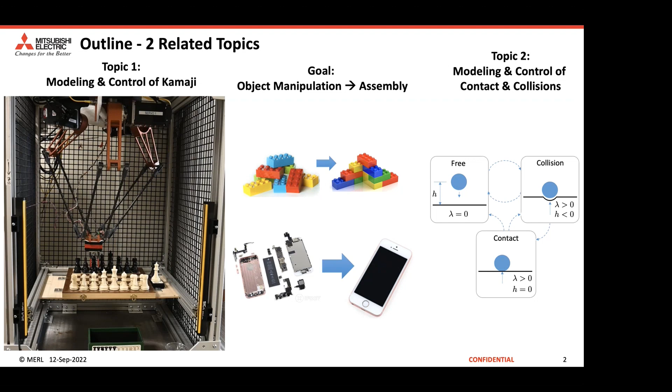So it's kind of ironic, but the robot, we got it to play chess over the summer. It's pretty fast, actually. But it's moving pretty slow because otherwise it'll throw the pieces around. Anyway, you can see how it works. And of course, this is a Modelica conference, so a lot of the work has been done using the Modelica language and sort of a combination of mathematics and the Modelica language.

Delta robots are becoming more popular now that there was a patent on these that expired about 5 or 6 years ago, maybe 10. On the right, they are closed chain kinematics, so that makes all the math a little harder, but not impossible. The advantages are primarily that they're very low mass, low inertia, and so they move very fast.

When we're doing assembly of things, we want to have a very low mass manipulator so we don't wreck what we're trying to put together. Obviously, conventional robots do some assembly. They have a lot of mass, they have very high friction joints, they move very slow. Honestly, the dynamics of contact and collision is neglected.

We're more interested in using a very low mass, low impedance device that can be very safe, but also very precise at the same time.

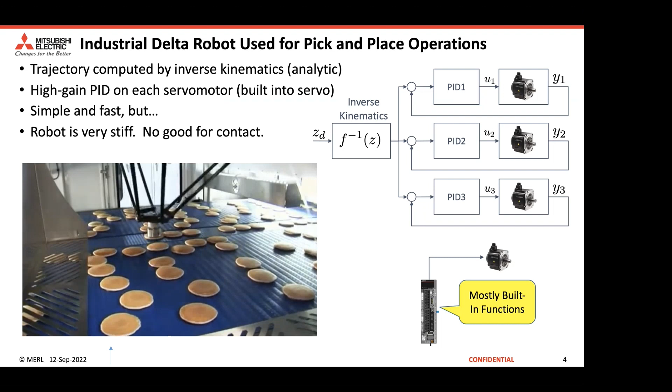So most robots are used for sort of pick and place, I should say all, and they're just controlled with a bunch of PIDs, very simple. This is how pancakes are made, if you ever wondered. The robot just picks and places them up off different conveyor belts.

But really, the goal here is to design some kind of nonlinear control. The first step is to feedback linearize the robot and do impedance control of the robot. So that's done. And then the second step, probably the more interesting one, is how do I cause the robot to assemble something?

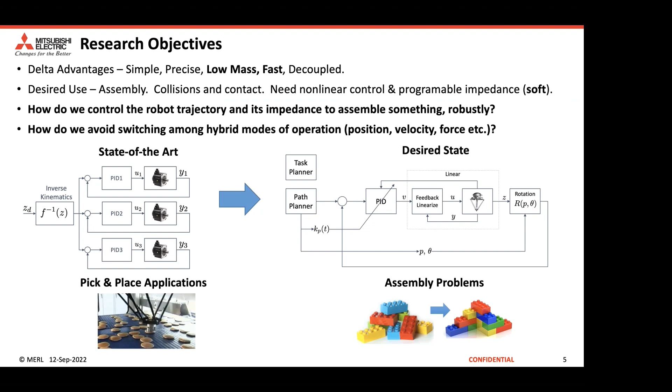We're trying to actually model the physics of contact and collision to do that. The Delta robot is challenging because the forward kinematics, which is the map from the joint angles to where the end effector is, is not explicit. You can't write it down in closed form. You have to write it down as an implicit set of equations, and because of that, everything gets a little bit more complicated.

One of the fun things about this, I'll go through this kind of quick. Probably 5 years ago, I figured out a way to model this as a set of differential algebraic equations, and you can embed that. There are a number of ways to represent these, it's not unique. I like to represent the dynamics of this in a higher dimensional space, and then you get a set of, essentially at the bottom, sort of 24 equations and 24 unknowns as an index 1 DAE, which Dymola loves to, or any OpenModelica too, likes to simulate and handle without a problem.

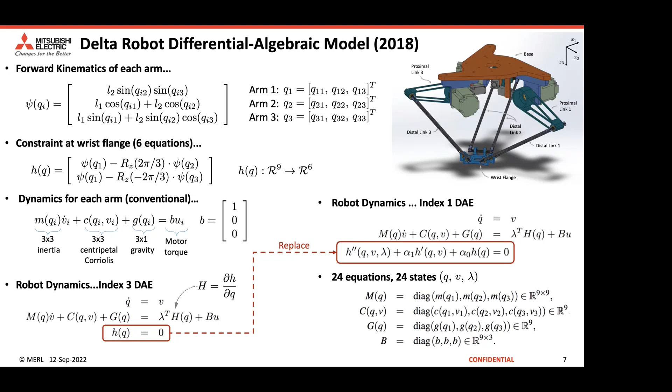One of the interesting things about this robot is it actually has two different Jacobians, if you know anything about robotics. The Jacobian is the map from a force applied to the end effector to the joint angles and the joint torques. One of these Jacobians we use for simulation, and you can actually write that down in closed form. Here it is, and that just maps a force to all the joints.

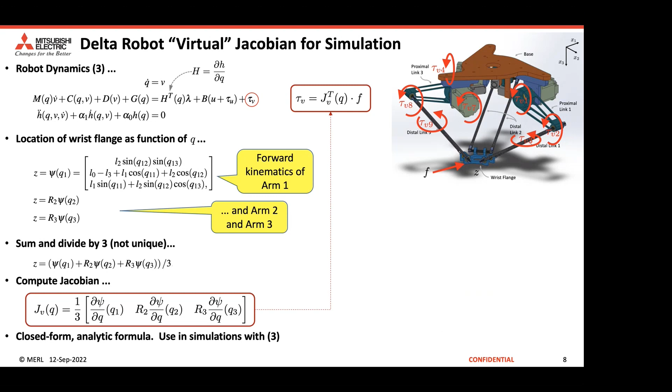But the control Jacobian, which is what we need to do control, which is the map from the force to the motor torques, this cannot be written down in closed form. So you also have to compute it as a solution to a set of nonlinear equations, and so you can only compute this numerically, algorithmically.

I think people will understand this. This Jacobian should not be used in a simulation because it's an algorithm, and you don't want to put an algorithm which has got a termination condition inside of a smooth model because it'll cause the solvers to get a little annoyed. So we use the other Jacobian when we're simulating the effects of force, and we use this to control.

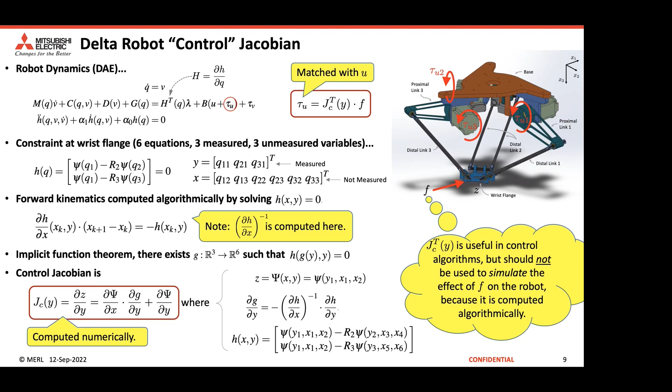So really what makes this robot interesting is its low mass and low inertia and very high speed, but also the fact that you have to use a lot more calculus to do things like computing its Jacobians.

One of the fun things about this robot is it has all sorts of weird kinematic singularities. One happens, of course, when the arms are all straight out. But another happens when the six parallel links at the bottom here all become parallel themselves. If you move it into this configuration, it's really singular, and it just becomes a spherical pendulum. It's useless as a robot.

What's interesting is that the model we have is global, so it can simulate through these singularities without any problem. Of course you can't control it through a singularity like this, but we can model it through the singularity without any problem, and that's what you want in a model.

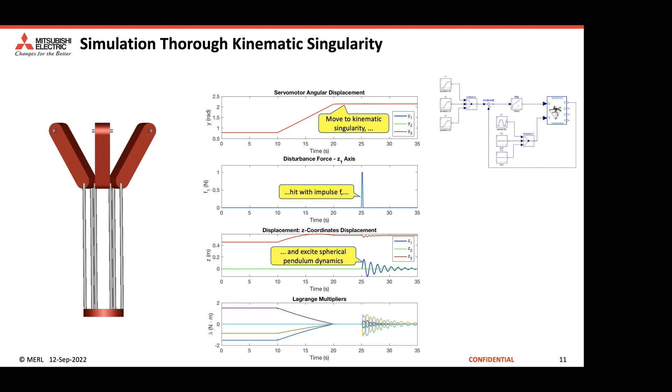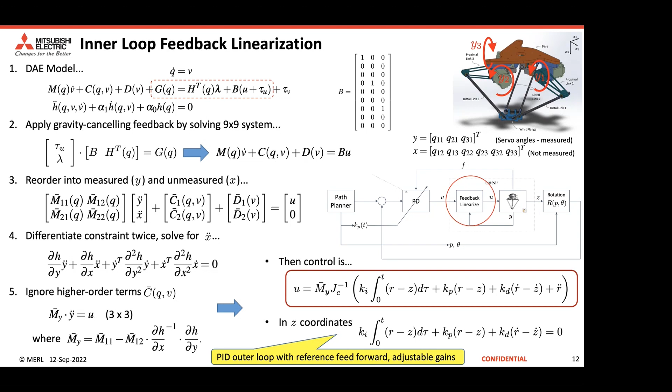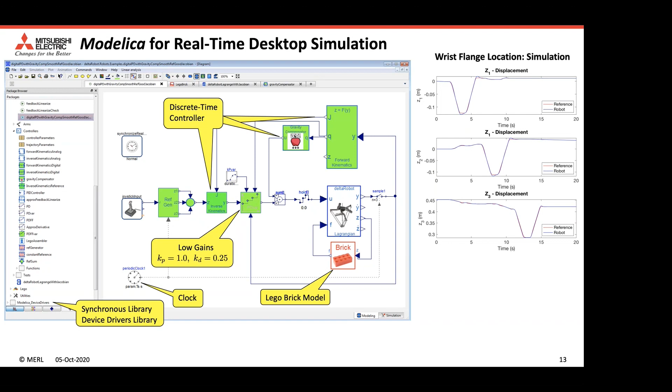The fun thing we did, and I think this is probably the main message here, is I had an intern just before the COVID time come and write an interface from Dymola, using the device drivers library, to the actual robot that we built. We wrote some C code to glue it together. Then we can just unplug the model of the robot, plug in his little interface, recompile it, and run a real-time experiment of this nonlinear controller moving the robot around.

I think this is nice - we could get it to run on, this is like 2018, a vintage 2017 decent PC. It's all running in Windows at about 500 hertz sample rate, which is pretty good.

And especially for an academic lab, or in this case Modelica—I said this yesterday too—you can use Modelica as a language to represent the physics, to structure the physics, to design and realize controllers, in this case all in discrete time, and then do a laboratory experiment all on the same platform.

Never have to recode anything, which I love, because I really don't like coding. Or recoding, I should say. So this was fun. He finished it the day before we closed down for COVID, and then the robot sat there for a year and a half and wasn't used. But you can see we hooked up a joystick, again through the device driver's interface, and could make it move around. It has really nice tracking, and that was kind of fun.

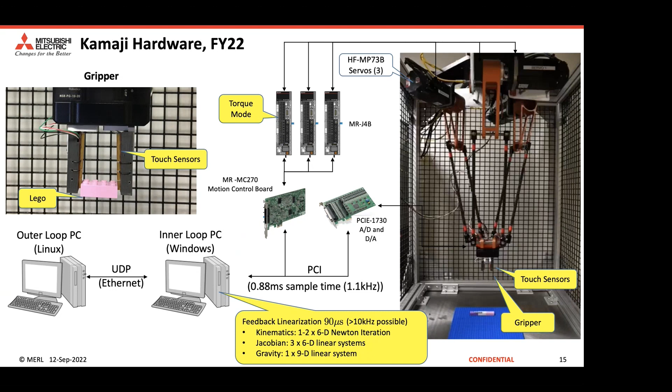So we're now starting to use some touch sensors and play with assembly type problems. I'll show you—well, I'm not going to show you it moving, I already showed you that.

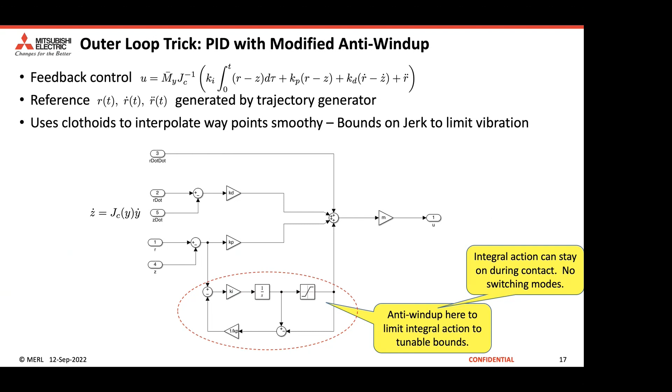One of the tricks we came up with is to modify anti-wind up a bit. When you're doing robotic assembly, if you have integral action in the outer loop and you come in contact with something, that integrator is going to wind up and you can get bad behavior like this. So normally the integrator is turned off in these robotic applications. Actually, if you implement the anti-wind up in this way, you can leave the integral action on, and when it comes in contact, you don't get that behavior. So that was kind of fun.

Another cool result—I did all these simulations in Modelica—is to simulate the effect of using touch feedback on the robot impedance. So this is kind of fun. You can actually reduce a robot's impedance with touch sensing feedback, and you can only reduce it within the bandwidth of the sensor, but it's actually quite significant. So if you go up there and touch the robot, it feels like it has much less springy feel to it. You can't do anything about the mass, but we already reduced the mass with the actual robot design.

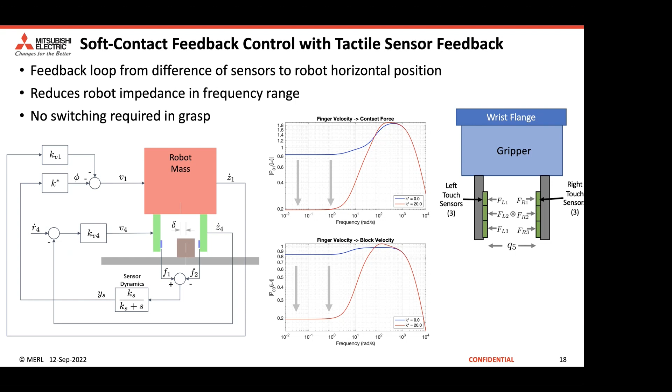So I'll skip this. There's an animation from Dymola, and here's our touch sensors, and it's got a very soft feeling. I think there's a movie here, it should run—and maybe not. How much time do I have? I don't know. Oh great, okay, I better speed up.

So it's very low impedance, and the whole point here is that when this thing contacts something—suppose it's holding something and you're trying to plug something in—you want to have a very soft, low impedance robot, not stiff. So if there's a little bit of uncertainty, nobody gets hurt. I have it playing chess. You probably all saw that video of the poor Russian kid who had his finger broken by the robot chess player in Moscow six months ago. This one won't do that.

Anyway, so it's probably enough of that. We're trying to look at this assembly problem, and I have a different point of view on robotics, maybe—it's much more of a model-based design approach. I'm actually trying to model contacts and collisions among different types of objects.

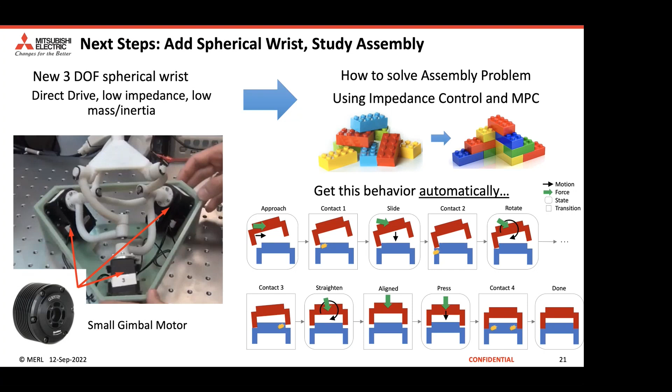And I realize this is actually kind of like what Dirk was talking about this morning. A lot of the modeling paradigms are actually missing the dynamics of collision. So I've been spending time looking at how to model that in a way that essentially ends up being a hybrid or multi-mode differential algebraic equation type model, which is perfect for Dymola.

I did write a paper on this three or four years ago that was wrong. It missed a few of these states, but we fixed it now. Actually, this is a very effective way to model contact and collision.

It's very well suited to Modelica because Modelica has this nice hybrid model of computation, with excellent state event detection. Essentially when two things come in contact, the state machine will change state, and I'm busy trying to figure out how to properly formulate that.

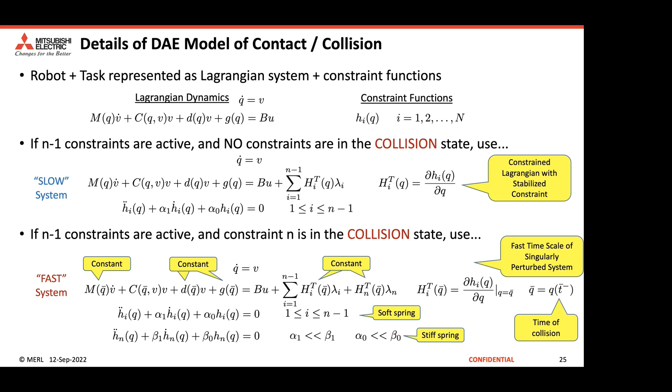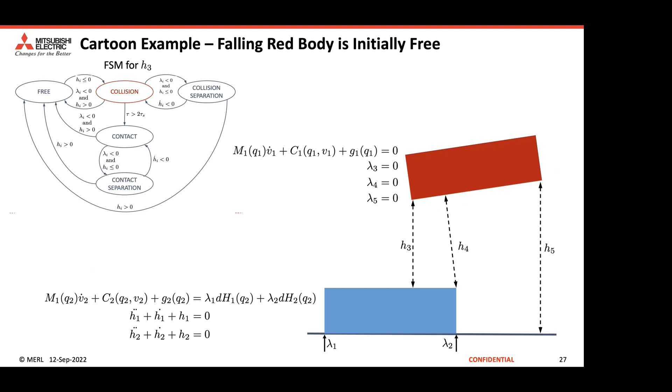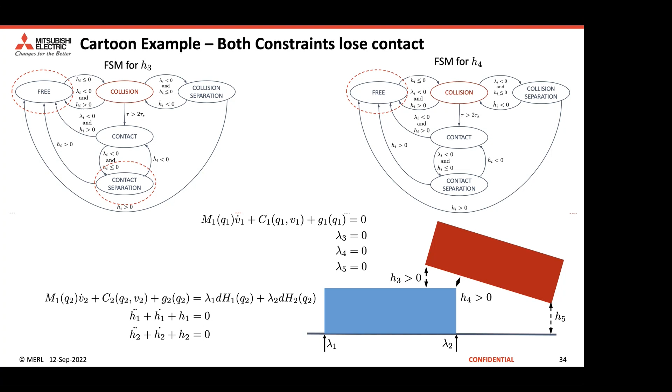Here's a toy example where this brick falls and touches, and there are a lot of events, which is fine because there are a lot of events. It goes through all that. The compilers, both OpenModelica and Dymola, handle this all beautifully. I sometimes think I'm going to miss an event and it's going to be a problem, but they're very robust.

One nice thing about this model is it's actually continuous, so you can show that solutions exist. Most models of contact and collision claim to be discontinuous - there's a jump in the velocity. That's because of the modeling paradigm they've chosen, not because the actual physics is discontinuous.

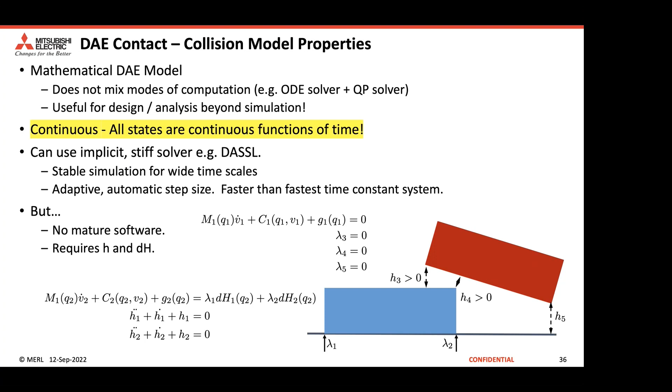This is a different modeling paradigm, and it's continuous. It's very much what Dirk was talking about this morning: you get stuck in your context and think that's the only physics, so you think it's discontinuous, but actually it doesn't necessarily need to be. It's nice when things are continuous because it's easier to solve.

So we've done a bunch of toy problems. I won't go through all this.

The next step, and this is my last slide, is to put these ideas together. I can simulate things moving around now, and I want to use this model to synthesize control that will assemble objects. The piece that's missing that I didn't talk about is the concept of a distance field. Distance fields have been used a lot in robotics for collision avoidance - I'm actually going to use them to cause the collisions we want to have, to assemble something.

I'm busy realizing that in Modelica in a library, so we can not only simulate an example of a robot, but actually structure the math and synthesize new types of controls.

So that's my user presentation. Yeah, it was a lot of fun giving these. I appreciate having the opportunity to talk about this and not have to write a paper. I like writing papers, but I'm many papers behind, as some of you know, and it's embarrassing. So I'll stop.

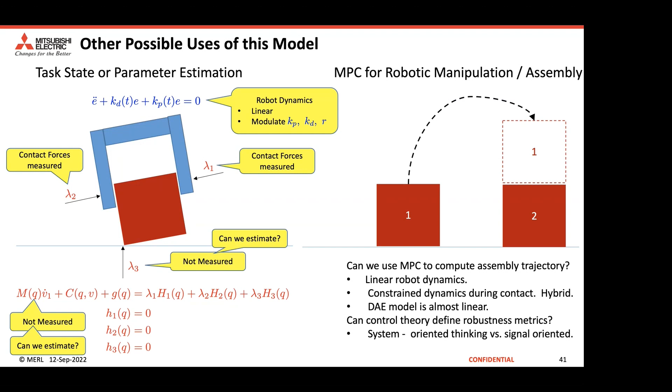So I wonder, how well does it do in that context? No, it's a really good question. I don't think this is appropriate for big, large scale - we can talk more about it, but I think there are going to be problems. It's more suited to a small number of collisions, which is the kind of robotics problems I'm interested in.

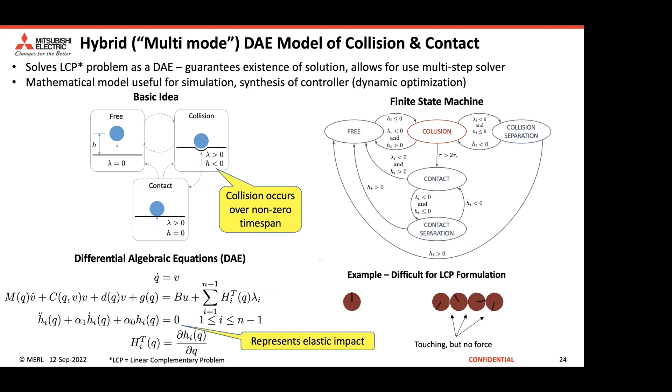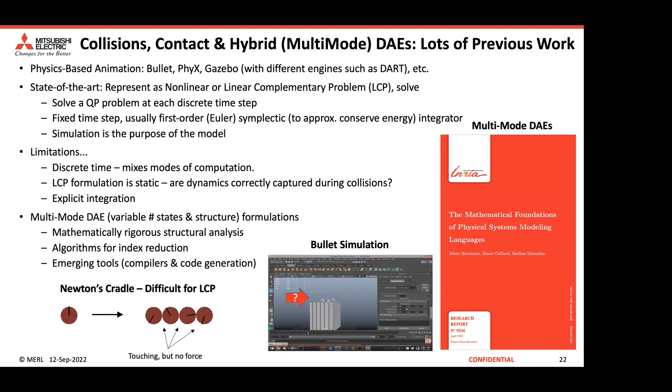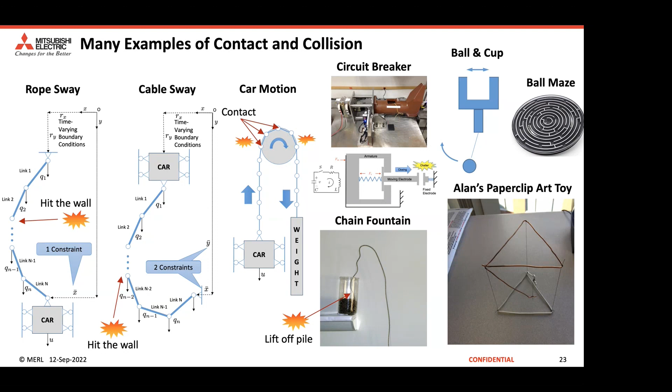My talk is on prototyping a composable simplification process for equation-oriented models using Modeling Toolkit. My core point today is that Modeling Toolkit makes it easy to design new and better simplification algorithms because of its interactivity. So a bit on Modeling Toolkit - just like Modelica, it's an equation-oriented modeling language. You have the common connection paradigm, and here is how to define parameters and variables and specify equations.

The composability of Modeling Toolkit mainly arises from the fact that all the transformation processes take an X system and return a Y system. X and Y are deliberately different because there is more than one type of system in Modeling Toolkit.

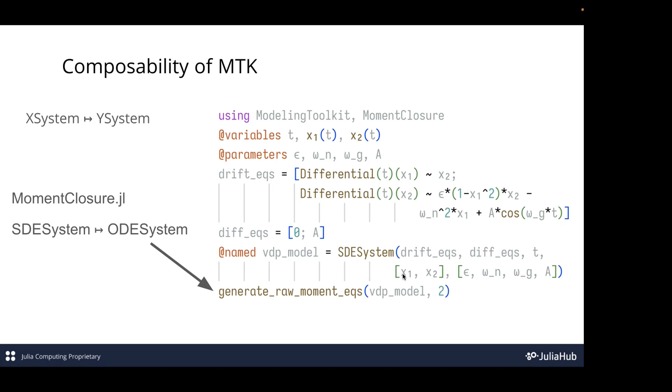So here you can actually also convert the reaction network to an SDE system, and then from the SDE system to an ODE system by using the moment closure package.

So Scott yesterday was mentioning how he wants a nonlinear symbolic model order reduction pass. So we actually already have that.

It's using the POD-DEIM technique that takes the symbolic representation of the model and the snapshot of the model to run a nonlinear order reduction on this ODE system. So it takes the ODE system and then returns another ODE system.

And even better, we have a frontend that converts Modelica to an ODE system, so all the previous transformation passes are actually usable for Modelica models.

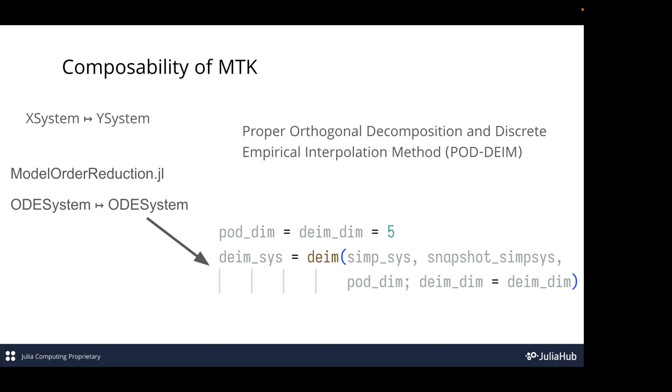And all these passes are actually not written by me, the Modeling Toolkit author. Especially for the nonlinear order reduction, this is written by a master's student just over the summer, and he is actually also in Cambridge, so we can talk about that in more detail as well.

So how have all these young contributors easily added all these transformation passes? They really didn't ask much of my help. So what makes MTK so hackable?

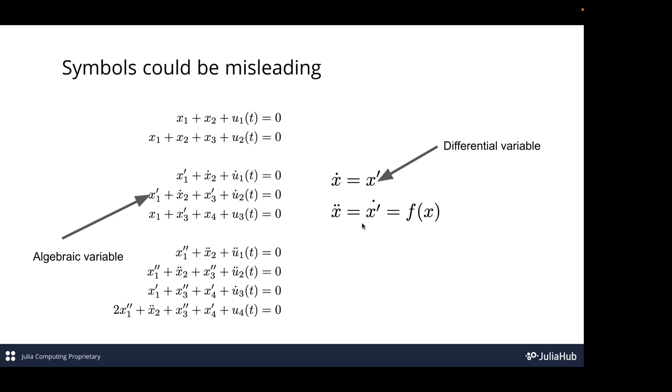Because the derivative of variable x1 prime never actually appears, this makes it an algebraic variable. But there is a derivative of x prime in here, so this is a differential variable. So that's actually not dummy, despite that it doesn't look like it.

If we think a bit deeper about what tearing really is, it's just a process that tells us which variable is being solved by which equation. So if variable number 1 is being solved by equation number 4, then you should have that mapping.

But some variables are not reducible, so it could be nothing. This nothing would indicate that this variable is not solvable. All the differential variables cannot be algebraically solved. So we can encode that information by adding another singleton type called selected state.

Then the classification of the dummy derivative just becomes that those are variables that appear to be differentiated, but the lower differentiated variable is not a selected state, which means it's an algebraic variable. That makes it a dummy derivative.

And in practice, this looks like that. So this is the original system in the paper. So after dummy derivative...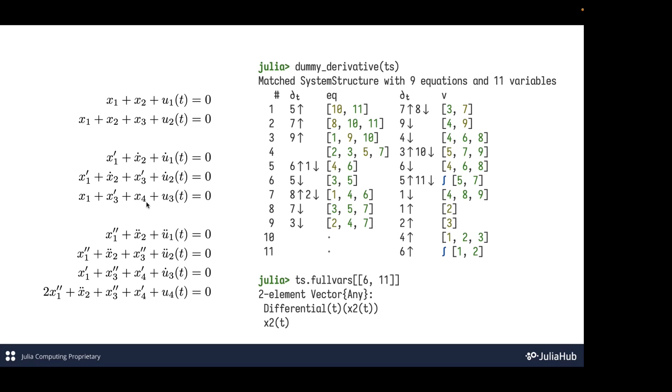And then I will talk about alias elimination. Alias elimination actually happens before the dummy derivative, but for the sake of presentation, I thought it makes more sense to talk about dummy derivative first.

Because equation-oriented modeling generates a lot of connection equations, and those are in the form of A equals to B, or summation of all variables equals to 0. Alias elimination removes those trivial linear equations.

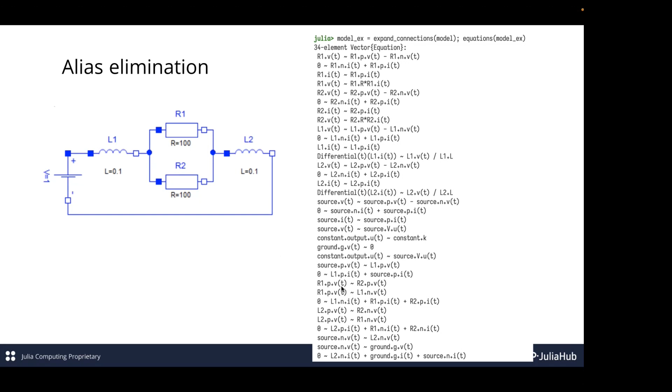So originally, this model had 34 equations. And without running alias elimination, just running dummy derivative, we can see that we have 4 equations.

But this system looks a bit weird, right? Can anyone tell why this is a bit weird?

So these two variables are differential variables, and then they are the only variables that appear in the 3rd equation. So that means this system cannot possibly be an index 1 DAE.

Because sometimes when running Pantelides, Pantelides is only a bit weaker than checking the actual numerical rank of the system. So sometimes it could give you a non-index-1 DAE.

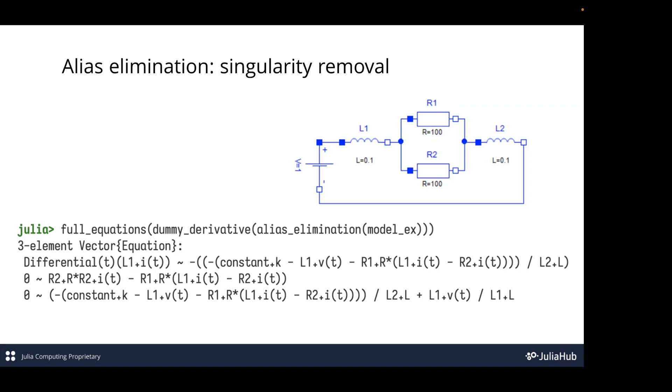Alias elimination will solve this problem because it removes all these trivial connection equations. Then the system is structurally analyzable, so it can reduce this DAE into an actual index 1 group.

We have an even stronger alias elimination. Normally in a lot of Modelica groups, it only reduces algebraic variables in alias elimination. We can actually also reduce differentiated variables.

So on the left, we have the system of DAEs, and we can convert this system into this graph representation, where all the arrows are pointing to the derivative of this variable, and all the equality signs indicate the alias.

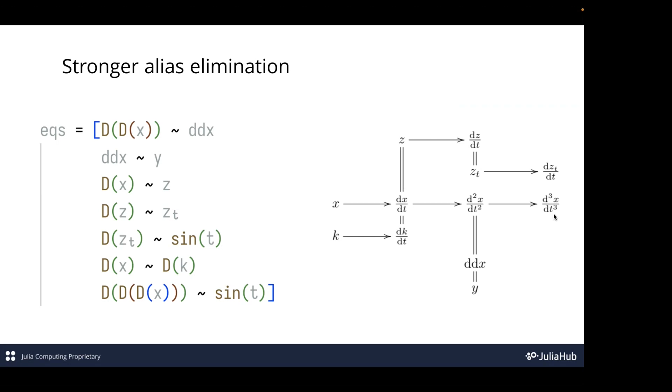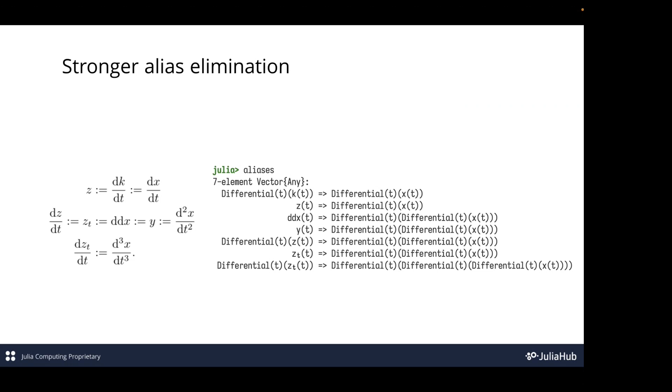So intuitively, you can complete the equality in here, and then complete the equality in here. So that will give us these aliases. And as expected, ModelingToolkit can actually generate and detect all these aliases automatically.

And then the last thing in this talk I will show is plotting the tearing state. So the tearing state, as I showed before, is the intermediate representation used in the simplification process.

And then after running dummy derivative and pairing, you got just a system of all these, because all these variables are differentiated and they are not reducible. So this is the optimal you can do.

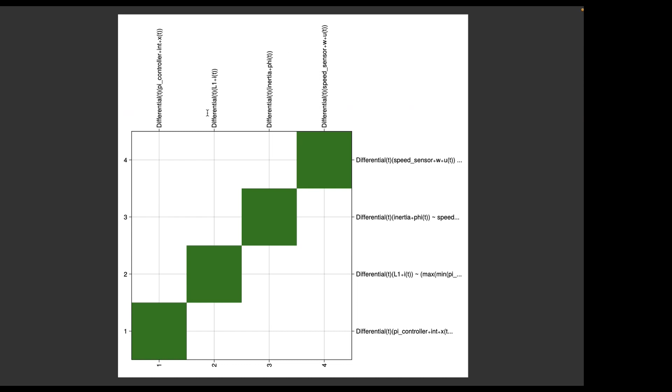Yeah, so you showed that you can translate a Modelica model to the representation — is that complete, or just partial, what is that? Yeah, the author of the translation is actually there, so you can ask him. So, yeah.

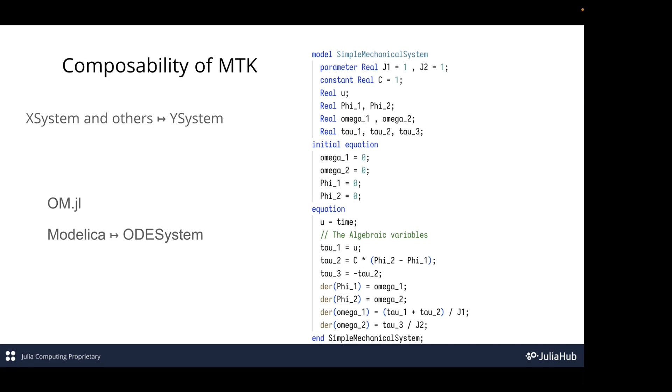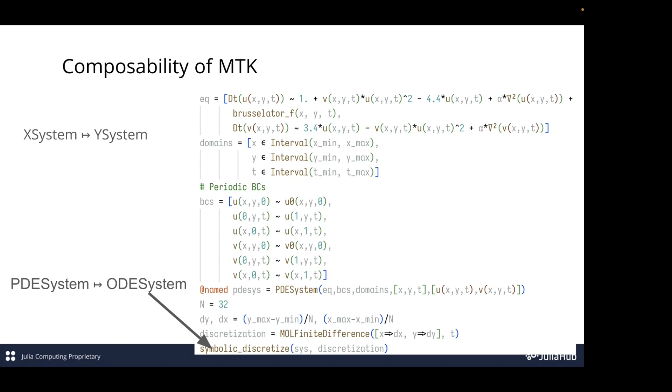You talk about this transformation, but there's a tree structure that shows the overall thing. You show transformation one at a time, but try to make sense of the overall taxonomy. I was going to say, you have PDE to ODE, and delta ODE, and ODE stuff. I'm just trying to get a sense of the entire picture, you're doing a one-off here with all these things. Are they all just in the ODE? Is this X going to be the ODE system?

Is that the only one? No. So for instance, here, you can actually use catalyst to convert a reaction network into an SDE system, right? It looks like maybe Y equals ODE in all these slides.

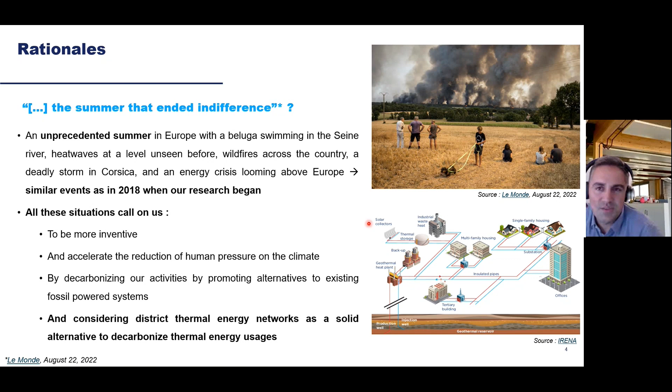Now I'm switching the mic to my colleague Patrick Chambard from Dassault Systèmes, who will give you the presentation of the project. Thank you, Valentin. I hope you can hear me, since I heard some difficulties a few minutes ago. So, Patrick Chambard from Dassault Systèmes.

I was coordinating the ModeliScale project, and it was a group of eight participants. As you can see, ENGIE, represented by Valentin today, plus some other big players such as EDF. EDF is also a major player in the industry domain in electricity production with a lot of power plants, especially nuclear, plus research centers and SMEs.

So we made together a collaborative project that is funded by the French state and that lasted 3.5 years. The idea was to address the energy domain, as you can see in the picture on the right side, in different facets.

Because of mainly pains such as difficulty to model, to compile, to launch, to initialize, and to run at acceptable time different models in the field of energy.

So for that, we aim to develop new concepts, especially from INRIA Research Center, in order to analyze large models in perspective of multimode behavior.

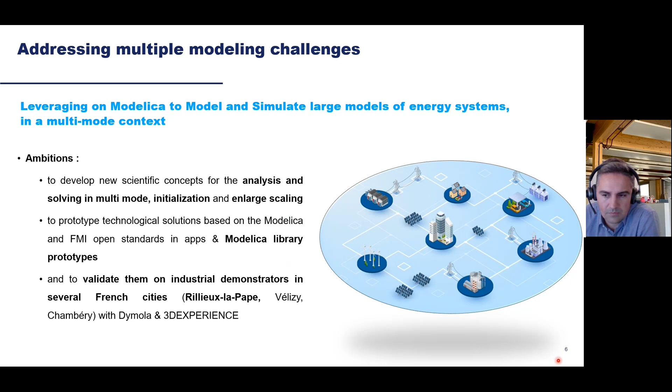So also we made some work together with EDF on initialization schemas, plus enhancements on the side of INRIA Research Center plus Dassault Systèmes in order to have a better capability to address large models. For that, we worked on Modelica and FMI standards.

And we also made some validation based on three large case studies from ENGIE, especially that will be described later. So about the global ModeliScale software results, just a few words, you can read the details.

An ISAM-DAE prototype is a structural analysis approach, an original approach from INRIA. They made several papers on that for analyzing systems defined in Modelica at the multimode level. Several enhancements in CATIA and Dymola apps with the increase of performance.

An approach for model initialization made together on a data plus model simulation approach with EDF, and coupling with the ISAM-DAE prototype made by INRIA, coupling between Dymola and ISAM-DAE in order to commonly analyze with the tree structure definition how it should behave.

Additionally, on the FMI side, there was some distributed large-scale co-simulation based on EDF as industry partner, and some enhancements for FMI version 3. Additionally to that, we had some library prototypes made by DPS, Eurobios, SMEs, and also a new PowerSysPro EDF prototype in order to calculate the load flow on grids of electrical networks.

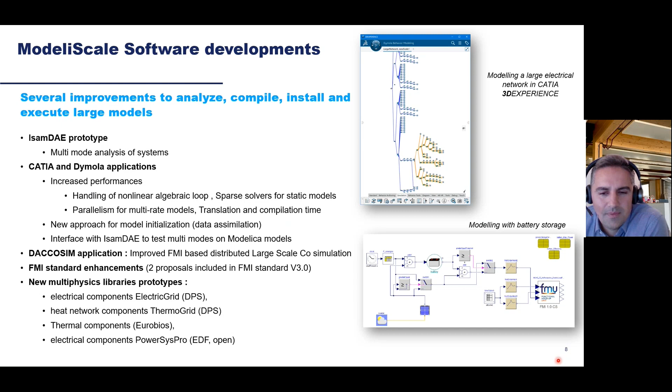To align this together with a global simulation. So that's it. I will hand over back to Valentin in order to focus more precisely on the heat network context. Thank you, Patrick, for this.

So, beside the software development, our consortium also conducted research and development on a dedicated Modelica library, dedicated to heat networks, to district thermal energy models. So on this, we model and simulate several components that are commonly seen in district thermal energy networks.

We have here a screenshot of the library that was developed during the project. We see that we have traditional components which are very close to the Modelica standard library components, but into these basic components, we have different assemblies which are more related to the district energy system market segment.

So these models were developed by the project team from operational specification and from the field requirements that were provided by ENGIE.

So the libraries break down into several fields. The fields most related to the heat network market segments address components such as heat exchangers, valves, and so on, but also different assemblies or complete models of parts of district heating networks. This library was developed by DPS, a partner in the project, and is now operational and used by the project members.

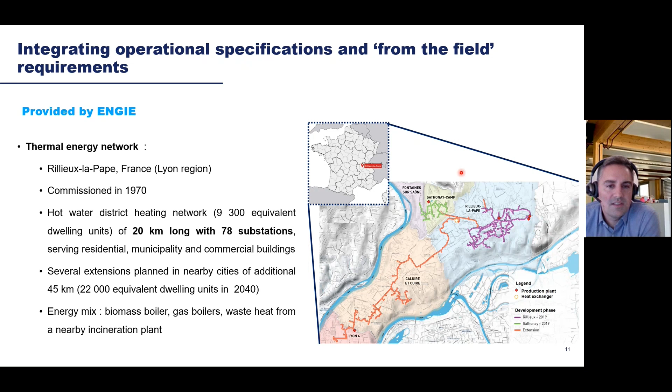Once we had this information from the field, we used the bottom-up modeling approach, which is not very far from current developments made by Long and other researchers from the National Renewable Energy Laboratory, United States.

We broke down the overall model or system into several blocks: the customer loads, the substations, the network or distribution, and then the production. Between all these components, we have different connection points that are represented in the Modelica library. For the customer loads, we used real-time data coming from our measurements.

We have several periods of measurements from 2018 to 2019, where heat demand, temperature, mass flow, valve opening, and so on are recorded and integrated into the model. We then have the network, the pipes—we can see here the overall model with 4 geographical sectors that were modeled—and at the end we have the heat production with the different production systems presented earlier with their main characteristics.

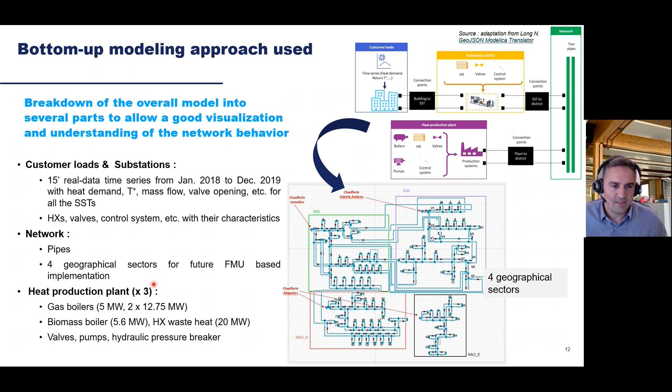So we proceeded to model this network, trying to reproduce the results of the whole system as in the operating conditions. We have here different screenshots with a focus on the waste heat power plant and on the substation system, which connects the distribution network with the building.

From this entire model, we simulated the behavior on a yearly basis, and we compared the simulation results with the measurements coming from the field. Engie is the operator of the district network, and the data was available to do this.

Based on this simulation, we also calculated several KPIs: temperatures, mass flows, and energy consumption, and we compared these results with data from the field. We have quite an interesting and good alignment between the simulated results and reality.

We have of course seen some difficulties, especially during the simulation phase, especially with the CPU time. But we have managed to progress on this and make significant progress in order to tackle all these issues, but also issues related to the compilation or execution of large models.

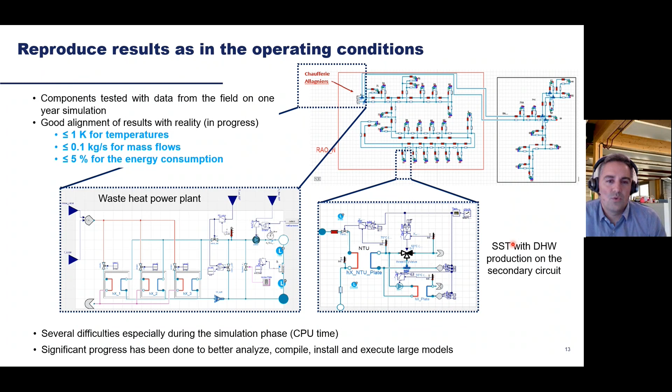Now I will give the floor to my colleague Charlie Duprat from Dassault Systèmes, who will give you a more detailed overview and show you a short demo of the network modification and modeling in the 3D Experience platform.

Yeah, correct. Thank you very much, Valentin. Can everybody hear me well? Yes. Great. So carrying on, Charlie Duprat speaking.

I am part of Dassault Systèmes, who was part of this project, and I was acting as coordinator on one of the work packages, the one we're presenting today, focusing on heat network industrial applications. Based on what Valentin just presented, you have seen that we developed a library and new capabilities in terms of modeling and simulation of heat networks. We figured it'd be good to apply this to a concrete case and leverage our internal product at Dassault Systèmes, the 3D Experience platform, to develop a demonstrator to better showcase the capabilities developed in the context of the project.

So this is what we did, and we chose a very simple scenario to make it as understandable and clear as possible, which is to make it very short, where in the context of a south of France city with 17 substations, slightly smaller than the full extent heat network, we are in operations phase, and due to, for instance, the addition of a new part of the city, new buildings, new infrastructures, there is a need to install a new substation, therefore to change the whole system.

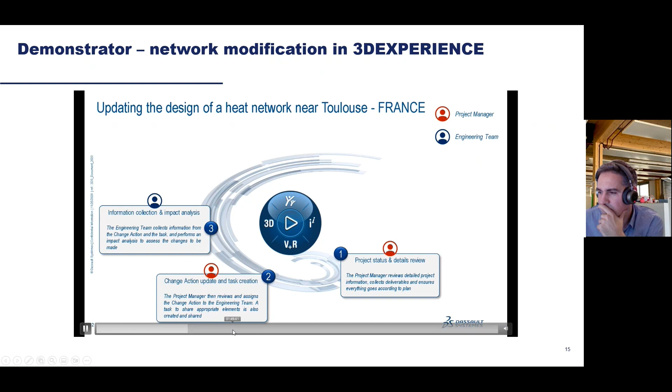So here, basically, it's an all integrated design, right? So you have the architecture, the functional and logical architecture, you have the 3D P&IDs, you have all the design integrated in a single environment, which empowers collaboration. And on top of that, obviously, you have the Modelica part that is put into music here.

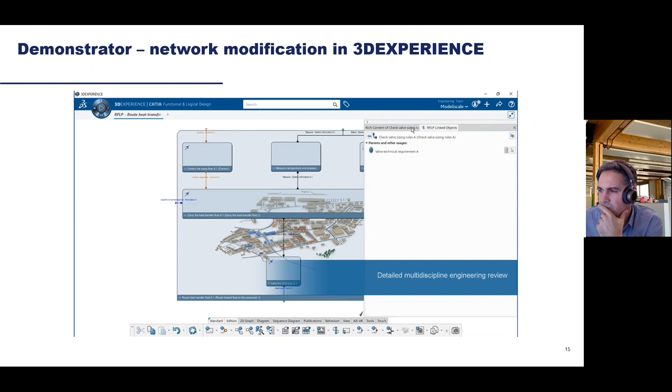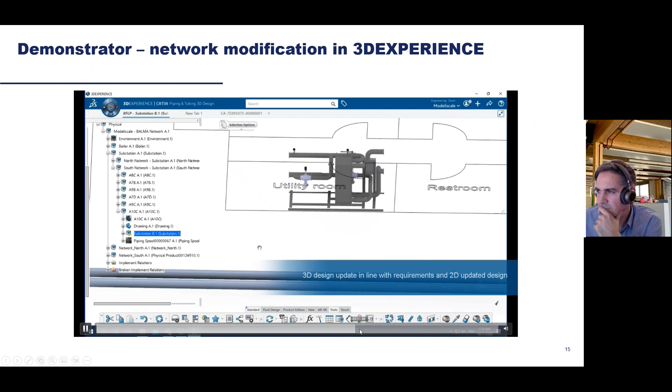So if we can fast forward a little bit more, Valentin. Okay, here we're updating the P&ID, relevant, but we have no time to comment this. A bit later, yes, this is a 3D update, right? So we're updating the 3D design directly based on what's been done in 2D. And finally, a bit forward, please. Thank you, okay, right there, we can leave it there.

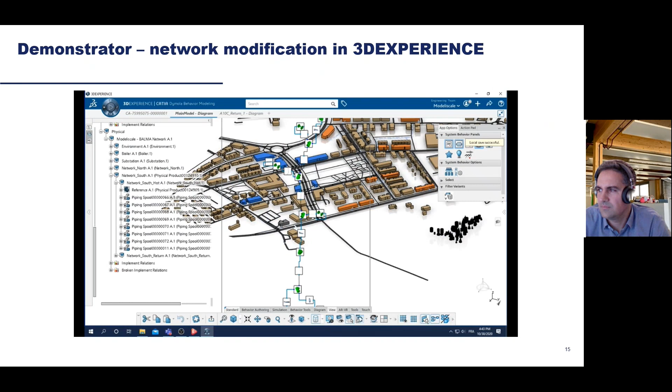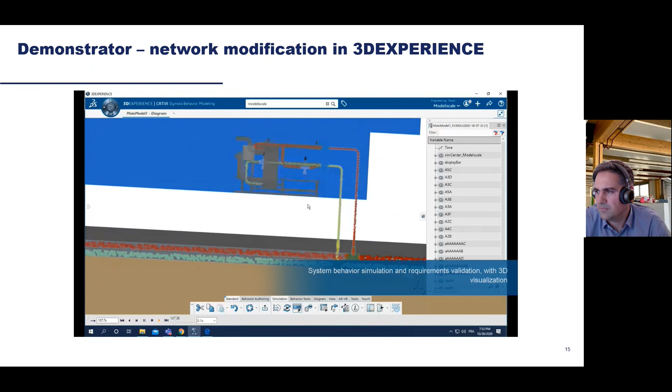Great, so now it's the relevant part in the context of this project. Here, we have updated the 2D models. We have validated this update. We have updated the 3D models. And now, based on this update, we have generated automatically the Modelica, the behavior model of the new part of the system, the substation, pipings, fittings, valves, and so on. And we have integrated that into the pre-existing entire behavior model of the entire heat network. So we've put it at scale, and we are now simulating this network to make sure that everything goes right as planned, as per the requirements. And what is being verified here is that the outputs, the values, are in line with the expected requirements.

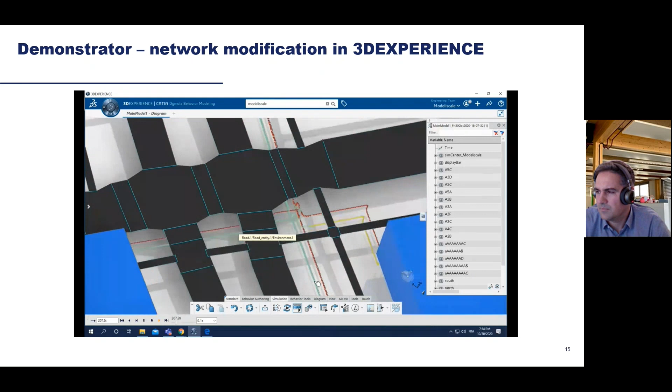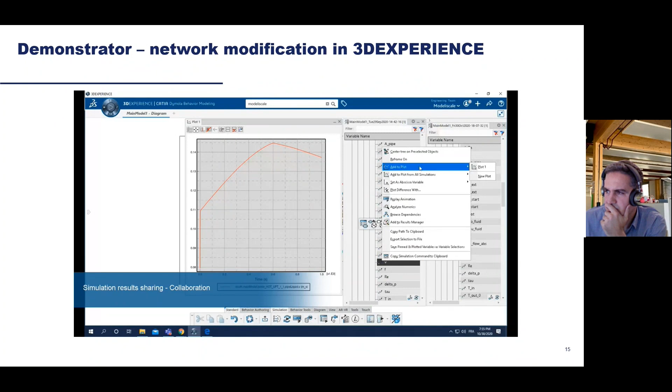And what's interesting here is that thanks to the use of this new Modelica library, in combination with 3D capabilities and so on, we're able to easily visualize the results. We're able to analyze in detail the results. We're going to see that just afterwards, but most importantly, we are able to put it at scale and simulate it in a reasonable amount of time on a wider scale model, 17 substations, with no performance issue and with pretty good accuracy capabilities thanks to this new library once again.

So if anyone's interested, of course, we'll be happy to comment further on this demonstration, but due to lack of time, we're going to stop there for today.

So it was a research project conducted during 4 years. We have explored several innovative concepts for large-scale and multi-mode systems. On the modeling track, several new techniques for systems initialization were made, and we have improved different capabilities of the Modelica systems with libraries, tools, and FMI approaches.

On the industrial track, all these developments were used to support design studies, to better understand the behavior of the complete system. Dymola software was used and was improved in order to be able to address other industries in this field.

It was an interesting collaborative opportunity around a topic which is still actual nowadays, and in the next months and years, we are planning also to continue our work and pursue this development, addressing larger systems with multi-mode analysis, compilation, and simulation. So that's all on my end.

We are at the end of the presentation. We would like to acknowledge all the supporters of the project, so Bpifrance and the French state in global.

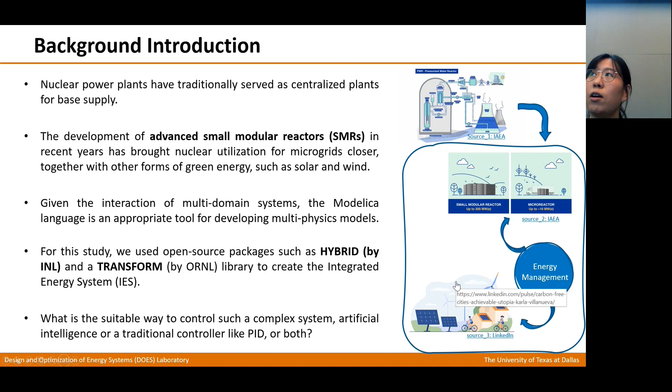With the complex IES systems, now it comes to the question: how are we going to manage those? That's also a question we ask ourselves. What is the best way to control this complex system? Is artificial intelligence more suitable, or do traditional controllers such as PIDs already satisfy this purpose, or should we use both of them?

That's our motivation. When we think about renewable energy systems, it is such a complex system that introduces multiple uncertainties from different sources of energy systems. So we are thinking reinforcement learning algorithms can probably be leveraged to cope with these uncertainties.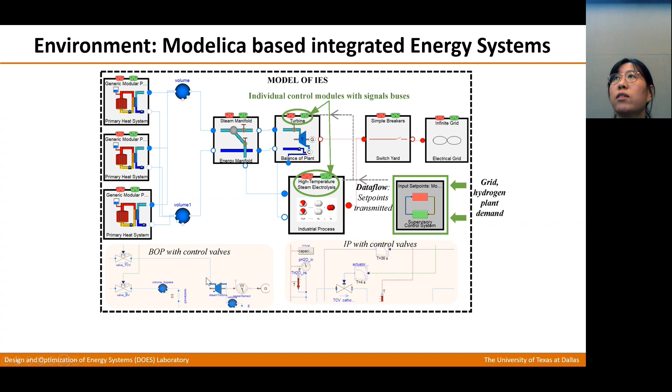In these models, all of these submodels like BOP or HTSE have been using PID for valve control. What we are going to do is replace this PID with RL control mechanisms, as it's more autonomous and can be developed online for real-time control systems.

Next, I'm going to talk about the actual experiments we have implemented in the balance of plant. Here I'll give a short introduction on the base plant we are using. The model environment is Dymola 2022, and the model invested with the RL agent is the balance of plant. For details of the model, we have the ideal turbine.

All right, I will try to use a laser pointer here. So we have an ideal turbine here, and we have condenser and also the heating source. So these together come coupled as the balance of plant. And then it have this TCV and BV as the turbine control and also bypass valve control.

So in the red circle, that's the PID controller that's originally implemented in the Modelica language. And then we are going to experiment with the reinforcement learning.

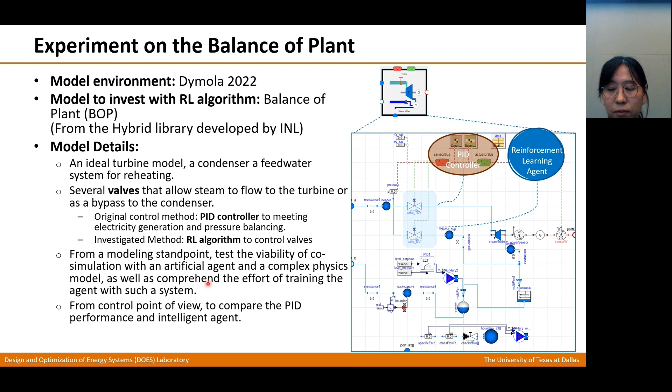So next, I'm going to talk about the AI part structure that we have been using. It's basically the RL framework that has the environment for us that will be the BOP. And then it will be interfaced with the Python Dymola interface to observe the simulation results, and these will be like the state observation going into the OpenAI gym. So the state will be understood from the agent side and then gave the action. So this loop is continuously when we gave a different electricity demand.

In the left-hand side, we have illustrated more details about what state we are observing from this balance of plant. So for power produced by the BOP, that's normalized based on the maximum power capability. And for the action side, we will be gaining action for turbine valve opening and also bypass valve opening. They will be positioning from 0 to 1. 0 means fully closed and 1 means fully open.

And on the reward side, we will be comparing the generated power and also the demand power. So the goal will be minimize this power error. And on the reward side, we will use 1 over the error plus the delta. Delta will be like very small values that's compensate for divided by 0.

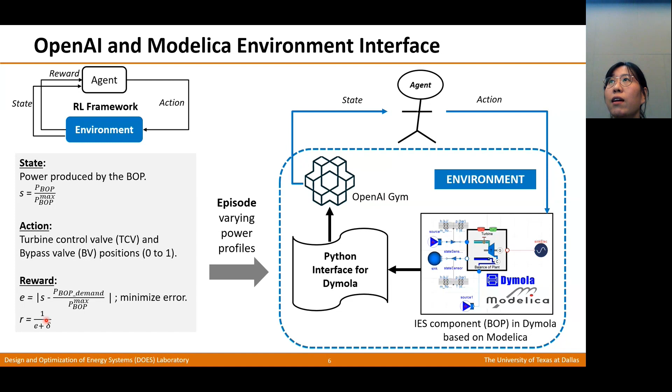All right. And for the learning framework, that's actually the DDPG, Deep Deterministic Policy Gradient algorithm that we have been using. It contains 4 neural networks and 2 pairs that's targeted as the main network that uses Q network and also policy networks. So the neural networks gets a state from the plant, and then it goes to the policy networks to understand to get action.

And then this action and state together will go into the Q networks to calculate the Q value. And also there's a soft update from the other neural networks that observes next state once the first pair goes through, and then calculate target Q networks. So these updated values will then go back into the main neural networks to update the weighting factors. Yeah, so these are the general functions that's being used in DDPG.

Okay, so I will go into some slides regarding the preliminary results we have been seeing. So from this slide, we have randomly chosen electricity generation required. So over here, that's a demand that's generated by the agent. So for instance, if it asks for 113 megawatts, as we could see the green line, originally without any control, it will have a default value with 408 megawatts.

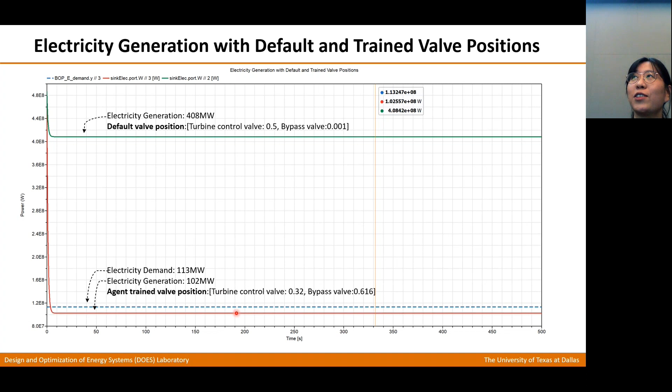So I'm going to talk about the training progress and also some challenges we have been facing. So overall, the agent will generate a normalized electricity demand while learning how to control the valves to meet the power demand. And we have performed trainings with multiple steps, with multiple episodes.

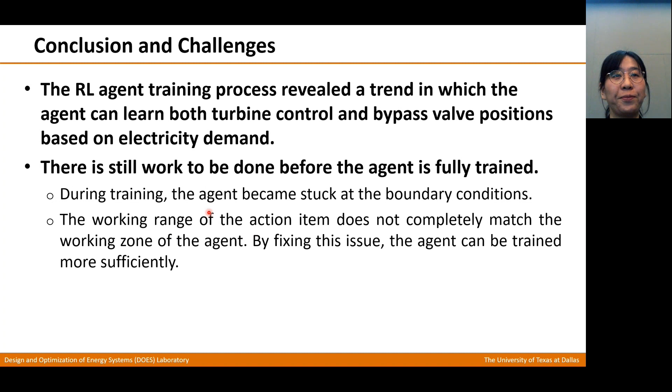That's all from my side. Thank you.

Are you using Modelica gym or Dymola gym? Which one? We are directly using OpenAI Gym. I tried to use Modelica Gym, but I faced some difficulties directly from that package, because you need to use FMUs. So I have used the FMUs, but yeah, there's...

Ole was visiting me when they implemented that stuff, and then he couldn't continue because he's Ukrainian, so they're in the war. But what we did is we replaced the FMU part with the Dymola API on the original Modelica gym. Ah, so now there is a Dymola gym. Yeah, I can send it to you.

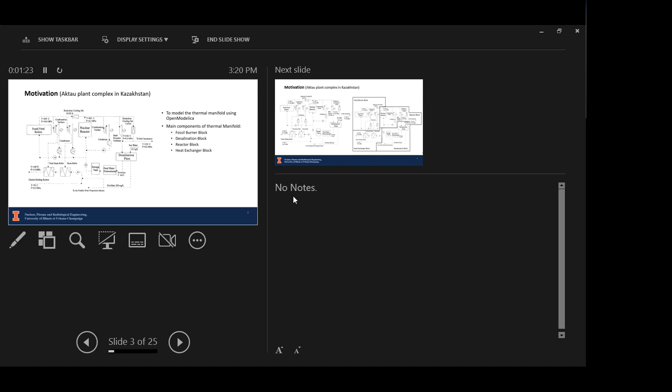The main motivation for this work was that a microreactor is being built on the campus of University of Illinois for the first time in the US, and maybe in the world. There was a reactor at the Aktau plant in Kazakhstan that powered a desalination plant and also power generation and district heating, and it operated nicely and safely for several decades. So we have chosen this as a model, or as a reference, from where we decided to start our modeling.

So I have started. My focus right now is on the reactor block and the desalination block, which I have modeled in Modelica.

On the right side is the model. So I've been using OpenModelica all the time, but my professor is always insisting me to move to Dymola because it's easier, and sometimes very difficult to debug in OpenModelica.

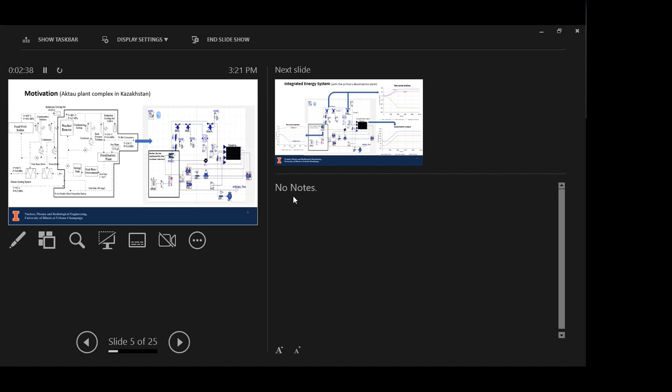On the right hand side, the desalination block is basically a black box. I found from previous literature how much energy is required per unit of desalinated or potable water. So using the energy coming from the turbine steam, I could calculate how much desalinated water it was producing. It was initially modeled as a simple black box model, but later I developed on that, and for the initial models I got some results.

Just looking at the results of the integrated energy system, I'll talk about the desalination output. Here, the total input is the blue line, the red one is the feedback, and the difference is the potable demand that is fed to the tank for storage and future use.

After modeling that part, I started modeling the desalination plant in more detail, not keeping it as a black box. This is an industrial multi-effect distillation nuclear industrial desalination plant used in a Chemco plant or Aktau plant. They used a 5-effect plant. I'll go briefly through this schematic figure.

While going to the deaerator, a scale separator adds some seeding crystals. The function of the seeding crystals is that when seawater goes through evaporation and distillation, scale formation occurs, which deposits on the heat transfer areas and might reduce the heat transfer coefficient. Seeding crystals attract or absorb those scales since they have similar composition, so that doesn't affect the heat transfer properties so much, because it absorbs those scales.

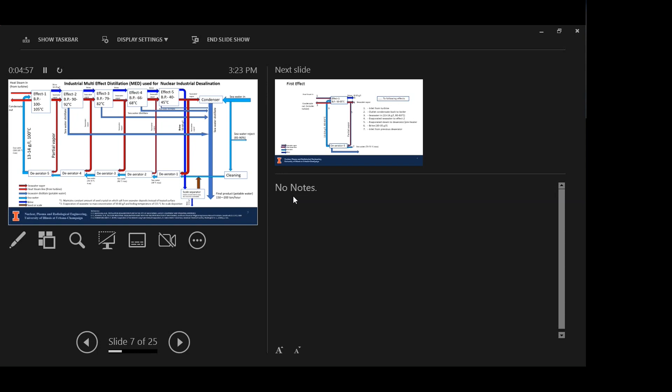Since it's very difficult to explain everything in detail in such a short time, I will just go through the first effect and the last effect to show what's happening. The remaining effects are almost similar.

In the first effect, heat steam comes in from the turbine, used to boil off a fraction of the seawater coming in from the deaerator. The heat steam condenses and goes back to the boiler, and a fraction of the seawater is boiled off as vapor, part of which is bypassed to the deaerator. Since a fraction is boiled, the concentration increases, and we call it brine. This brine goes to the next effect, and the vapor also goes to the next effect, boiling a certain fraction of that brine again, and this process continues to subsequent effects.

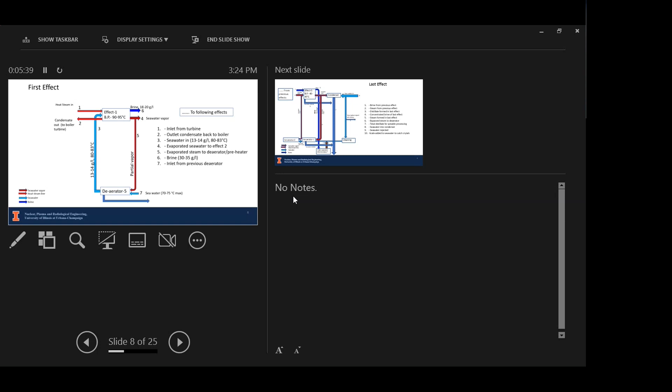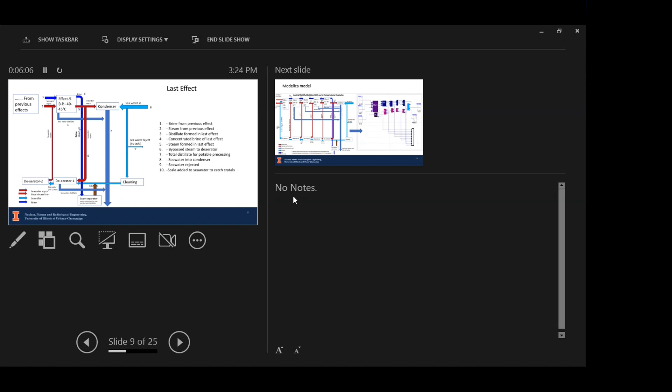So I have modeled this whole thing in OpenModelica and tried running it with some practical values, and I'll show the results.

But there is a problem: an operating limitation or criteria for the plant. The final seawater or brine concentration cannot exceed a maximum value, because if it does, the seeding crystals cannot absorb the scale, and the scale deposits on the heat exchange area. To solve this problem, I had to design a controller, because the limit is 60 grams per liter — the final brine concentration should be between 50 to 60 grams per liter. So to operate within these restrictions, I have designed a controller.